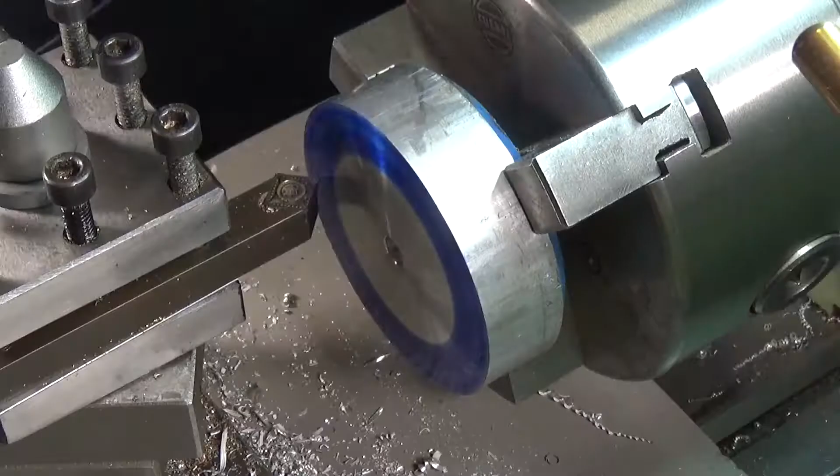Right, so I put a little bit of poor man's marking blue, i.e. Sharpie, on the outside of the face here, and I've moved this is my chamfering tool, but it's going to work fine for what I want to do in the middle of the flywheel. I've moved it in exactly 500 thou on my hand wheel on the lathe, which is the way my lathe works. That's a 1/4 of an inch, that's 250 thou from this edge.

So I'm going to put a marker line there. That's the line I'm going to come out from the middle to, and then I shall basically relieve that to give the relief in the middle of the flywheel. So let's get going. Too fast. There we go. So just come in a little bit and give us a line. Right.

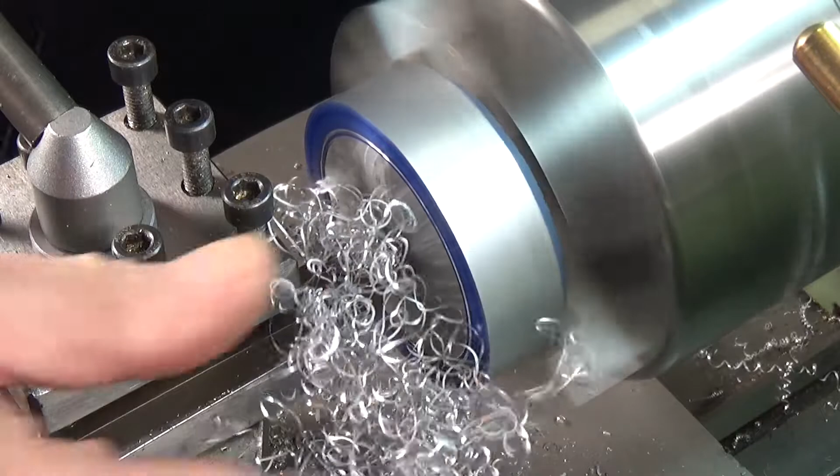I won't get right up to the line to start with. I shall do most of the cutting and then I'll finish it off. Well, I'm not going to bore you to death with hours and hours of that. I'll come back when I'm nearly done.

Right, we're pretty much on the last cut now. I've gone to a depth of 100 thou, which I think is nice enough. It's going to give a reasonable bit of definition to the flywheel, and I'll show you how I measured that in a minute. Let's just take this final cut. Get in a bit closer to look at this so I can get it to the line nicely.

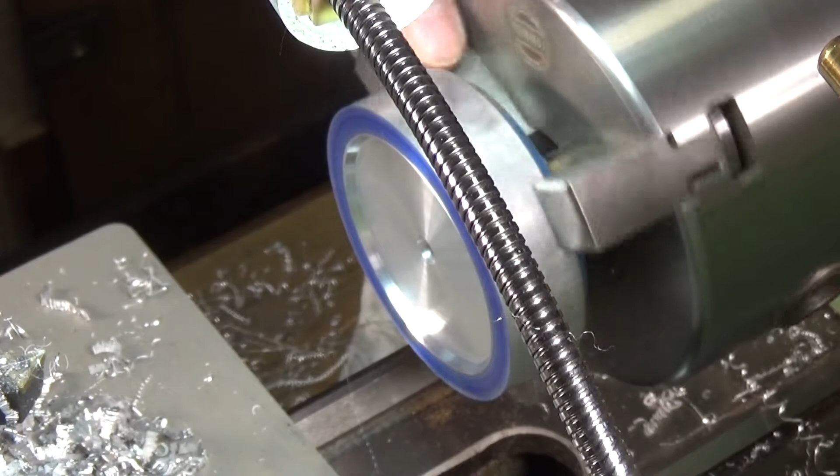And I think we're about there. Yes, it's come out all right. I'm well pleased with that. Well, there's a little tiny scratch. I might just, yes, I'm gonna just lightly scratch that because there's a very slight scratch on that surface. So that's

very nice indeed. I think that'll do for that face. And now I'm going to flip it over and do the other side. I don't really think you need to see that. Also, I'll need to turn the other side down a little bit because it's too thick at the moment. Yeah, that's pretty much our flywheel. The other side will be exactly the same.

Oh, you may have noticed, of course, that I've swapped tools again. There wasn't quite enough clearance on my chamfer tool to get in on this edge, so I've had to go back to the standard cutting tool. But yeah, it's all right.

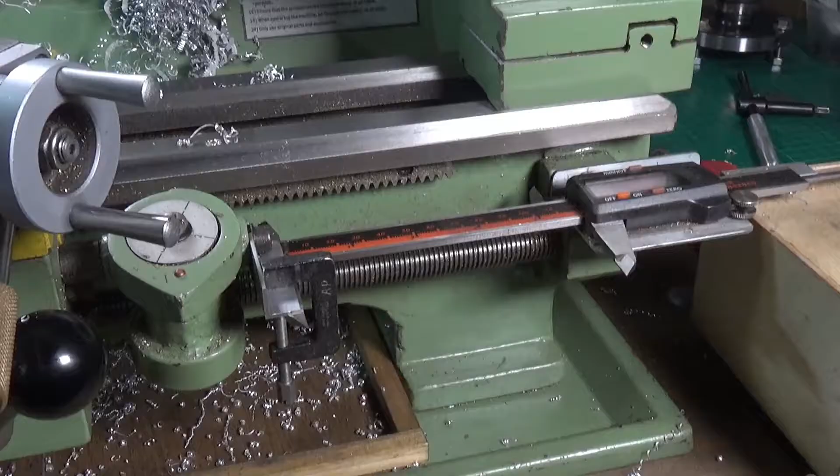Turned out okay. Yeah, so to get the depth of the cut I've just made, that's my ultra high-tech X-axis DRO that I have on my lathe. It's a 9 pound digital caliper from Banggood, but it does the trick nicely, and you can get nice, accurate depths of cut using this, and that's what I used to get the 100 thou depth on that last cut.

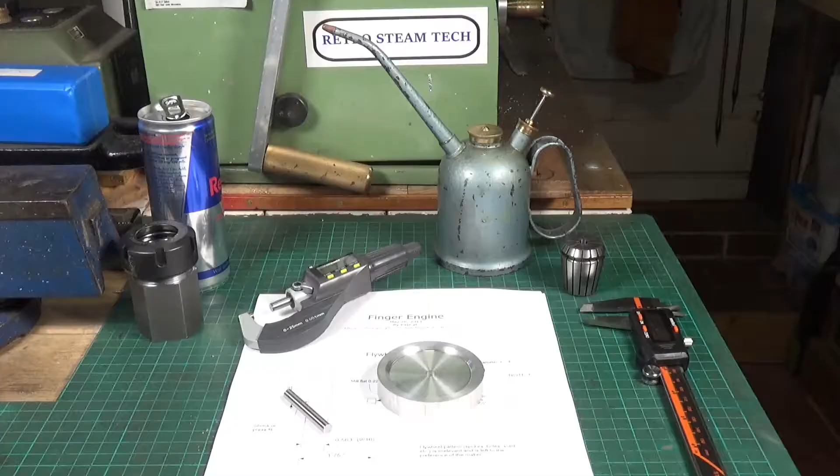There you go. Well, the flywheel is done. It turned out okay. Both sides machined. Still got to clean up this edge here. But we've made stuff up number one already, and that is, I don't know what the hell possessed me. Well, I've drilled the bloody hole in the middle of it too big. So this, which should be an interference fit, which is the axle, actually just goes all the way through.

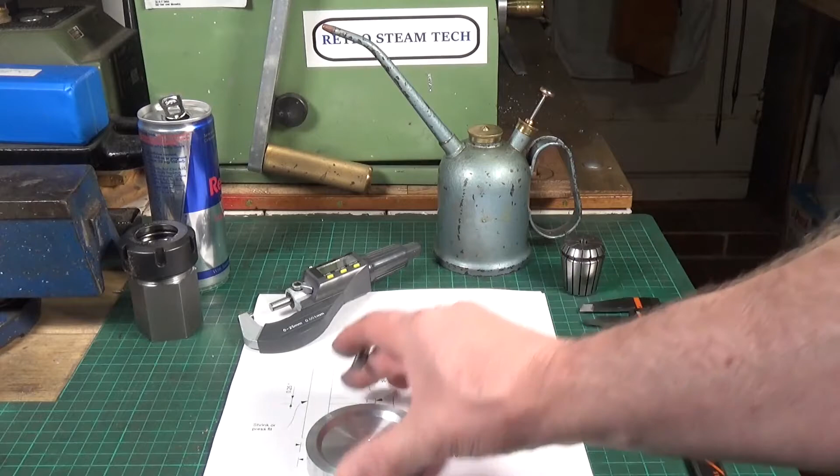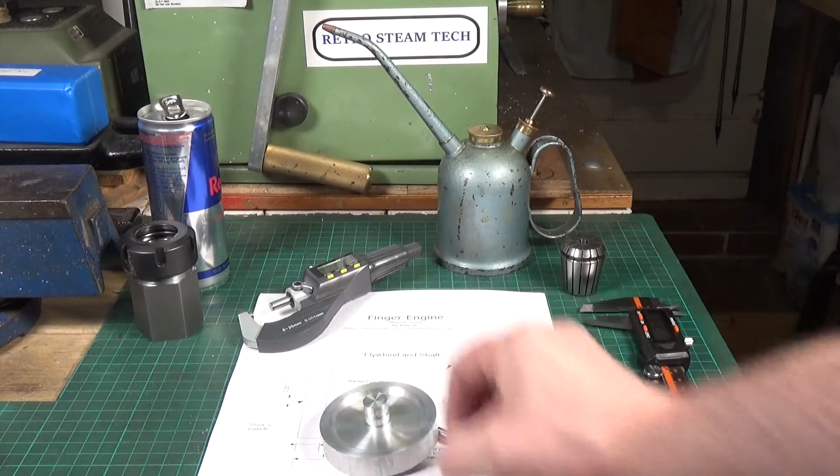So there's several ways that I can fix this. I certainly don't have any more aluminium, so I can't make another flywheel, which is one option. I could make an oversized shaft, which is another option, but I don't want to do that. So what I'm going to do is drill out that, put a plug of aluminium in there like that, and then re-drill it. And this time, hopefully, I will actually use the right size drill bit rather than the 1/4 inch drill bit, which I used the first time. And I don't know what the hell I was thinking.

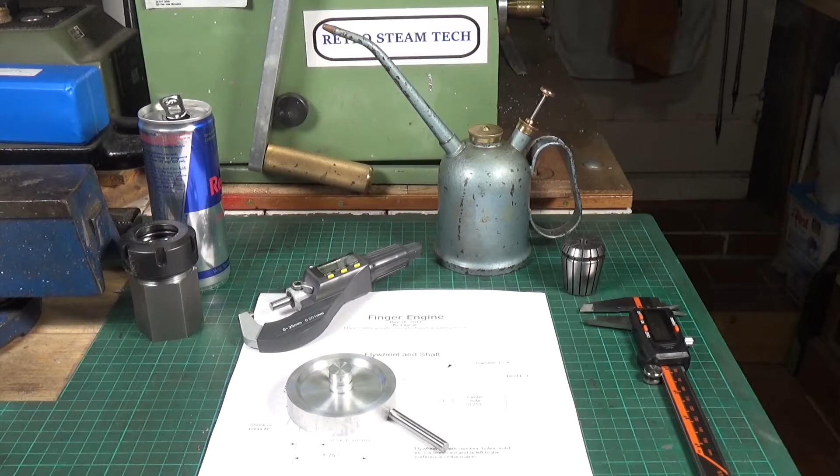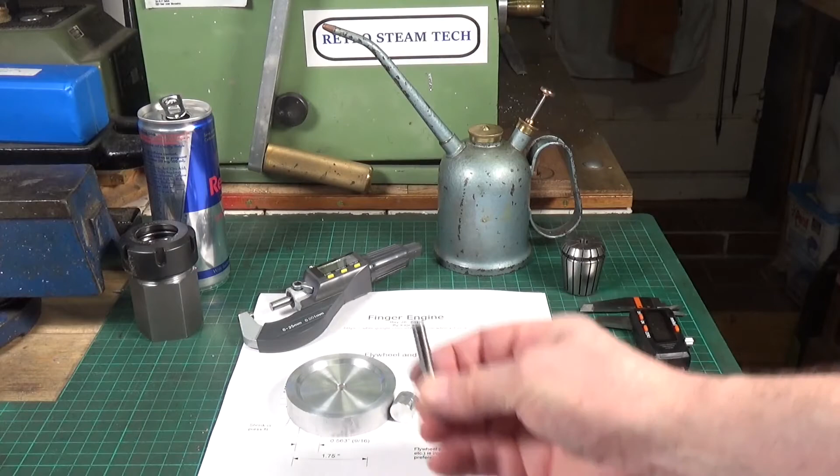So yeah, I need to drill this out, so that's a good press fit in there, and then I'll machine it down and then we'll re-drill it. But I'm going to do that off camera because that's not really part of the build. The next proper machining job will be to put a flat. There's a small flat on the drawing on one end, and this is where the grub screw on the crank engages with the shaft, and we'll do that on the Sherline, and I'll actually do that one on camera. But fixing this bodge, I'll do that off camera.